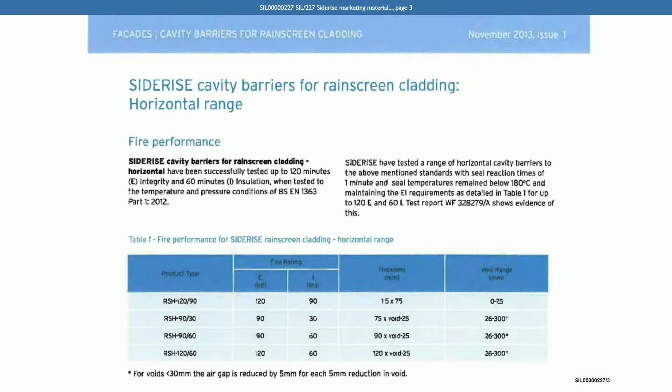Can we look at the report referred to there? There is a test report with the number 328279. Can we go to that report again, SIL00000212, and I want to look again at page 31. We get the integrity results at the top of that page in the table. Now we can see from this table that only specimens A and D have achieved the integrity requirement of 120.

Do you see that? That's correct, and that refers to the 120 product in the table of the datasheet. Yes, so specimen A was 120 millimeters thick, specimen D was a graphite intumescent, and specimens B and C were 90 millimeters thick and 75 millimeters thick, respectively. Can you help us as to why, even though only 2 of those have got over 120, the results in B and C are not reflected in the marketing literature? They are. If you go back to the table and the marketing literature and read the paragraph again, it says performances up to 120 minutes. If you look at the table, then it has in there for products B and C, 90 minutes integrity. I see.

Okay, so you're satisfied, are you, that they're comfortably within those limits? Yes, yes, okay.

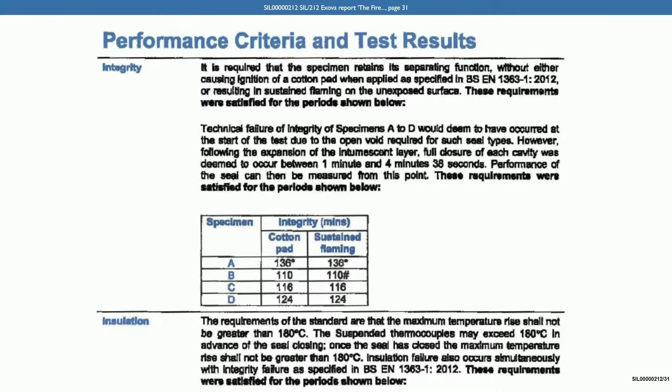Now, this document entitled Cavity Barriers for Rain Screen Cladding, if we go back to page 1 of that document, SIL00000227, so that's its title, Cavity Barriers for Rain Screen Cladding. It's right, isn't it, that nowhere within this document or any similar marketing literature has Siderise expressly stated that those barriers have never been tested as part of a rain screen system, but have only ever been tested between concrete lintels.

That's not made clear, is it? Not in this context, no, but as I explained yesterday, testing cavity barriers on the furnace test, the temperatures are higher on the furnace than the failure criteria for an 8414. So therefore, a cavity barrier would not be the weak component within an 8414 test.

Yes, I understand that's your evidence. And I think the discussion yesterday on the 25mm air gap and the panel movement, I think it needs to be understood that the intumescent at 1.5mm thick has an expansion coefficient of 25 to 1, so it will expand to 37.5 millimeters. So it's over-engineered for a 25mm gap.

Yes, I understand you're saying that about the cavity barrier, but this is a document that is entitled Cavity Barriers for Rain Screen Cladding. And I just wanted to be clear on the point that in this document, it does not state—I appreciate you say the reasons why that is—but it doesn't state that the barriers have been tested between concrete lintels and not with a rain screen barrier on the outside.

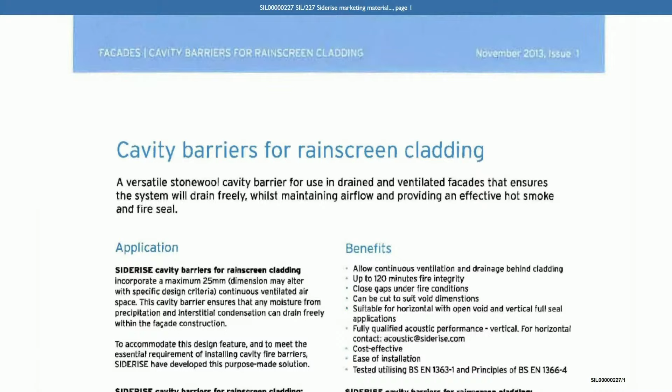Yeah, now let's just look at another document now. This is RYD 303992. This is another Siderise document from March 2015. Sorry, no, RYD 303992, and that's got 4 zeros, the one on the page.

RYD 303992. Yes, so here's a document from March 2015. You can see that it says version 1.4, March 2015, in the top right-hand side. And this is entitled Siderise RH, horizontal, and RV, vertical, cavity barriers for use in the external envelope or fabric of buildings. And at the top, we can see in the part with the picture, facades, horizontal and vertical cavity barriers for rain screens.

And if we go on to page 3, we have some similar text to that which we saw in the document we were just looking at, on the right-hand side. I'm not going to ask you about that again, we've gone through those points, but I want to ask you about some text about the 50mm air gaps on the bottom right-hand side there.

Siderise RH50, open state horizontal cavity barrier for maximum 50mm air gaps. Do you see that paragraph? Yes. And if we could just go down the page so we can see the text underneath.

It says there, Siderise have tested a range of horizontal cavity barriers with 50mm air gaps to the above-mentioned standards, with seal reaction times of less than 1 minute. And here it says full closure at 2 minutes 22 seconds. So you are using a full closure figure at this point in the marketing literature, yes?

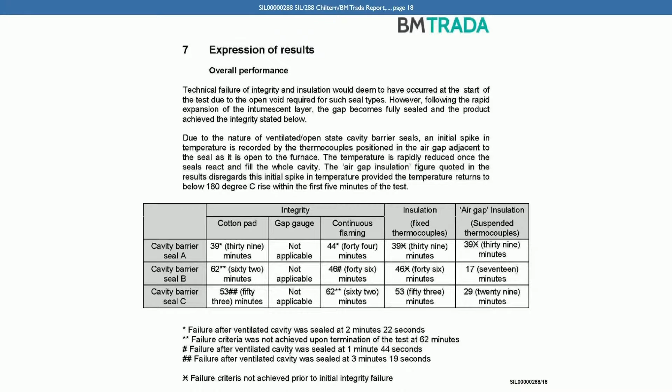I see. Moving away from the marketing literature now, but before we go to your Grenfell project work, can we just look at a document from January 2015, SIL 406559.

This is an email chain relating to a Belfast hospital project. If we look in the second email down in the chain, we can see on the 19th of January 2015, Kelvin Williams, a Siderise employee, says to Barnaby Carrick, also within Siderise, hi Bar, referring to an email. He says in the second paragraph, Chris M issued a statement that all requests for these products would have to be okay by him.

Now, can you recall what that statement was and what products had to be okayed by you? Yeah, if you look at the subject title, it says Belfast Hospital MSDS and technical data sheets. At the time, we were looking at resource level within the business as to how often we had these inquiries directly through to us to supply data sheets and MSDS information to a customer, as opposed to our website.

Yes, and what does MSDS stand for? Material Safety Data Sheet.

So it's basically I was keeping a tally on the number of times this was happening. Right, on the number of times that you had to supply data sheets to customers on projects. Yeah, whereas opposed to our downloads.

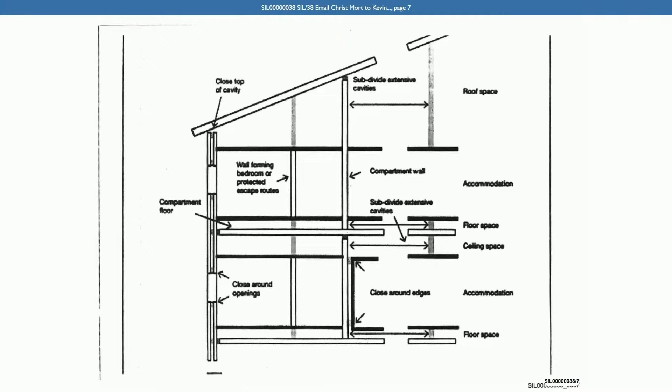And you say below that, if you need me to comment on a specific detail, please forward over and I will respond immediately. You apologise for the delay, and you also attach diagram 33 so that they can see that below. And we can see from page 7 of this document run that diagram 33 has been provided by you at that time. And you've also provided some standard details, some Siderise standard details. If we look, for example, at page 5, you provided some standard details relating to the Siderise products, yes? Yes. We can see on the right-hand side in the label to that drawing, it's headed Siderise standard details compartmentation.

Now, you did not in this email say anything about the suitability or risks associated with using cavity barriers in conjunction with ACM rain screen cladding. That's right, isn't it? That's correct. Can you explain why not? Why not identify those risks when you were responding at this time?

We were responding as to the suitability of the product for use within a common construction environment. The checks on the cladding suitability, etc., are not the responsibility of Siderise. That's the responsibility of Harley Curtain Walling, the fire engineer, and the approving authority on the project.

You didn't explain that your cavity barriers had only ever been tested between concrete lintels and not in an ACM system. Why was that?

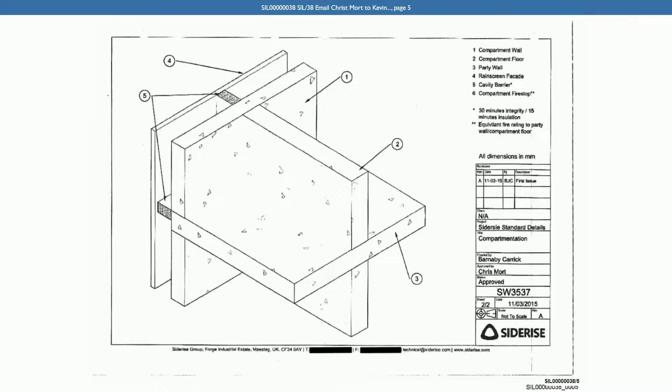We test to the published standard. Under the CDM regulations, the designer of the project is responsible to understand the overarching regulations required. They should understand the requirements of Approved Document B, and the testing for cavity barriers is in compliance with the table in Appendix item 15, cavity barriers 30:15. The overall wall section in Section 12 of Approved Document B is the responsibility of the facade contractor and the end users. It's not us—we don't supply the panels.

Why couldn't you have said, for example, something along the lines of: do bear in mind that if the ACM cladding fails, the cavity barriers will be ineffective, and we have only tested our cavity barriers in these limited scenarios? Why didn't you spell out that in your response?

At that stage, we weren't being asked that question. I answered a specific question. Yes, but wouldn't that be information that it would have been helpful for the design team to be aware of? But the design team, under the CDM regulations, should be aware of that situation anyway. It's not our responsibility to enforce the CDM regulations.

Yesterday, I showed you parts of Dr. Lane's report where she identified the potential mechanism of failure of cavity barriers when used in combination with ACM or other metal cladding panels. And you accepted that in general terms, the risks about the way these cavity barriers might behave in combination with rain screen panels was appreciated by Siderise prior to the Grenfell project. For the transcript, you said that at page 121 yesterday, day 102.

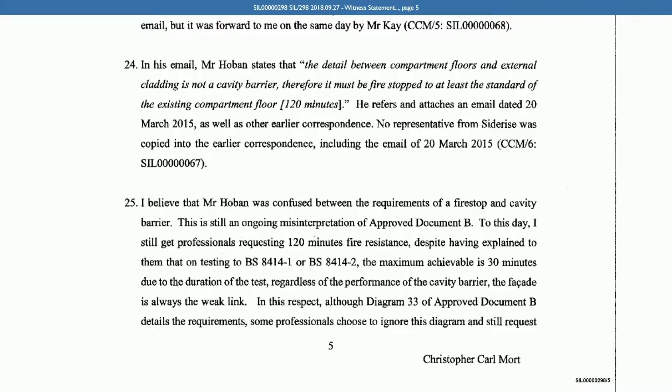And in terms of why you've not raised those limitations, can we refer back to the answers you just gave a moment ago when I was asking why you never raised these risks with the professionals on the Grenfell project? It comes back to, we haven't got any design responsibility on the project. We are not contracted for design. There's fire engineers, there's consultants, there's architects, there's approving authorities. They are the ones who are responsible for the project.

Now, you say at paragraph 26 of your witness statement, page 6, that it's likely you spoke to Mr. Kay about this email, although you're not able to specifically recall. Does that remain the position, that you can't recall specifically discussing this with Mr. Kay, although you think you probably would have done? Correct.

We can see, moving forward with the documents, if we go to SIL 6070, that Mr. Kay responded to Mr. Hoban's email. And this picks up on something you were mentioning earlier, that Ricky Kay goes back in this email to Ben Bailey and John Hoban, and he says, this is the 30th of March 2015, dear all, please can somebody forward over a drawing of the build-up of the cladding so that my technical officer can evaluate and forward an official response with a Siderise product specification. When he's referring there to my technical officer, is that you he's referring to? Yes, he is.

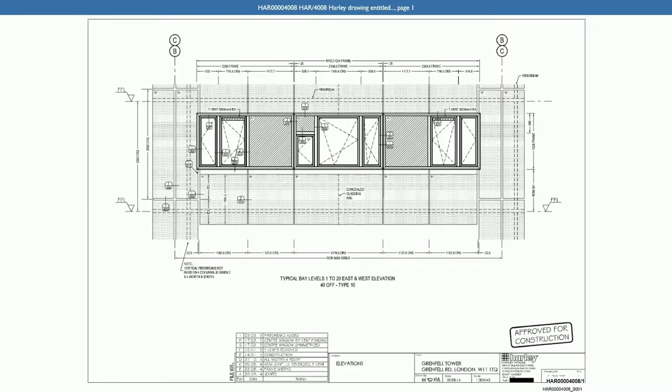And then if we turn to the next document in the run, RYD 37412, we can see that Ricky Kay has responded to Ben Bailey saying, to enable us to assess, please see attached markup of section drawings that are required by my technical officer.

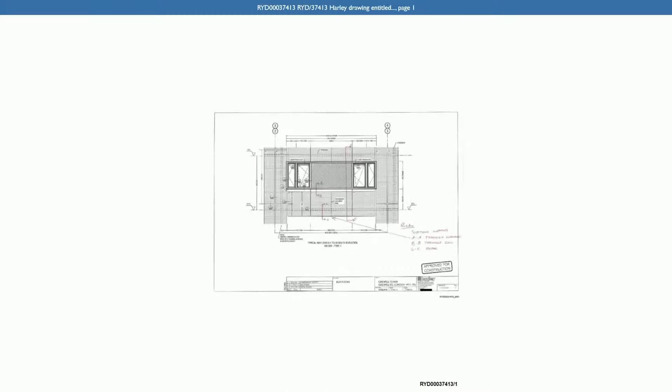And if we turn to the markup, this is at RYD 37413. If we could blow that up, what we see is some red pen annotations on this drawing where you've identified 3 sections, section AA, BB and CC. Yes, can you see those? Yes. And is this your writing? Yes, it is. And you've indicated section AA going through the cladding, section BB going through the sill, and section CC showing the total section, so you can see the whole thing, the full building.

And if we turn now to Mr. Bailey's response to this request for sections, this is HAR 19401.

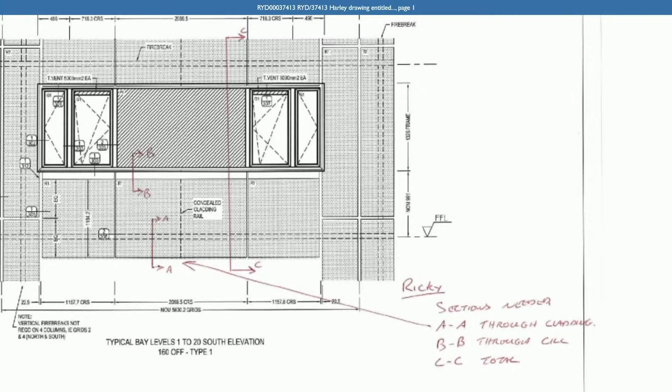We can see that Ben Bailey responds on the 30th of March 2015 to Ricky Kay and copies you in. He says: Ricky, as discussed, the 2 drawings attached represent section AA window head and BB window sill, which can be combined to create CC, as we don't have a drawn detail to cover what Chris is requesting. Do you see that? Yes.

Did that strike you as odd that they couldn't give you the combined section CC? They were only going to give you the window head and the window sill detail separately, but not the whole section? Yes.

From me, I would have expected to see section CC because it gives you the full picture of the makeup. And on other cladding projects, if you'd requested that, would you have normally been provided with that? It's normal standard construction process.

And was it sufficient? Mr. Bailey is indicating here that it would be sufficient simply to imagine combining these drawings to create CC. Was that sufficient in your view? With my experience of facade curtain wall design, I could combine the 2 to understand what was going on, although section CC would have clarified it.

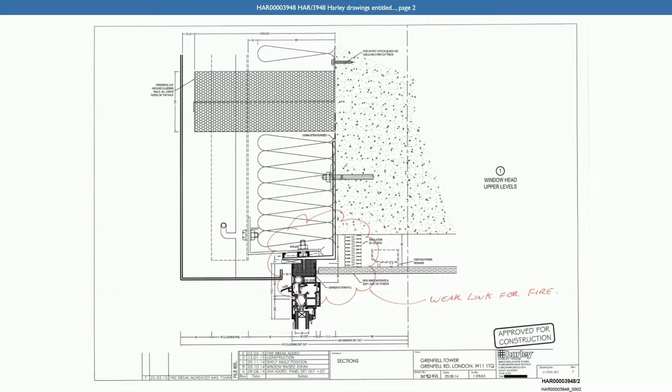Now, the drawings that Harley sent you, and if we go back to the sketch at the top, page 1, just to be clear, what you've done on this sketch is you've suggested your doubling up solution on the right hand side, is that right?

Yes. So what you've done is above each window you've put 2 cavity barriers, both of 90/60, to give you 180/120 protection. As you go up the building, you got one at the sill, one at the head, one at the sill, one at the head, as you go up the building.

And just to be clear, that doesn't solve the problem with the head of the window, does it? No, not at all. This was just your doubling up solution for the building control officer who wanted 120. In reality, the windows should be further into the building to align with the existing structure.

Yes. Now, these drawings that Harley had sent you did not include any cavity barriers at either the jambs of the window or the sill of the windows. Did you notice that at the time?

The vertical cavity barriers that are drawn on the drawing, without knowing the makeup of all the bracketry that's within the curtain wall system, the verticals seem to be logically as close as possible within that window zone.

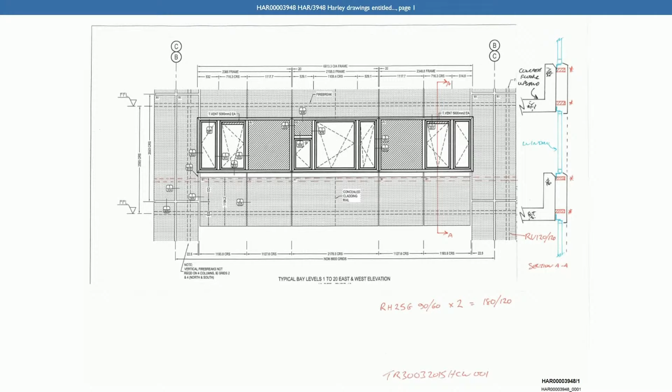So if we look on the right-hand side, that cavity barrier you've added there at the sill location, that's not immediately at the sill, is it? It's still a little bit below it, yes? In all fairness, what's drawn there is a schematic. I'm not responsible for the overall design. It's a schematic drawing from the very poor drawings that were given by Harley.

But did you intend that somebody looking at these annotations would appreciate from what you'd put here that there also ought to be cavity barriers at the sill of the window? There should be, but like I said, the design team for the project, including the fire engineer and the fire strategy, they should have discussed the locations of all cavity barriers on the project. There should be, within the fire strategy, clear drawings laying out the location of cavity barriers and fire stopping on the project.

Did you ever say that to Harley? Did you ever say verbally around this time, these drawings are very, very basic, you should have something better than this? Not my place to do that.

And did you ever raise this weak link point any more widely than we see in these emails? Did you ever discuss it with anybody subsequently? No.

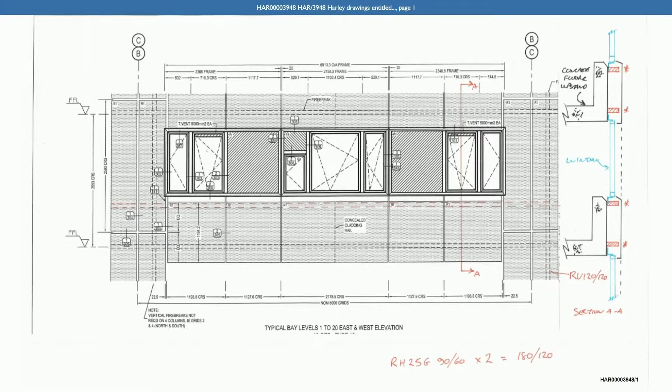This was the covering email we looked at earlier where you sent these sketches. Looking at the third paragraph down, you say: please note that without specific details of the overall construction of internal linings and/or the fire strategy for the project, I can only offer the proposal above. And as this is a refurbishment, I would imagine that the internal linings will remain in situ.

Made good to openings only, which does not aid the fire strategy. Now, can you explain to us why you said that in this email?

On a refurbishment project, you can see from that drawing there's an existing window frame. On residential refurbishment projects, they don't move the residents out, so the existing window frame would remain in place until the external items have been installed. Then they would remove or crudely remove the internal frame. From that drawing, they're quite clearly leaving the frame in place and making good around it. It's a refurbishment strategy. Yes, yes.

Did you feel that you were able to advise without sight of that fire strategy for the project? No, because like I said, I'm at Siderise, we're not contracted to the project for the fire strategy.

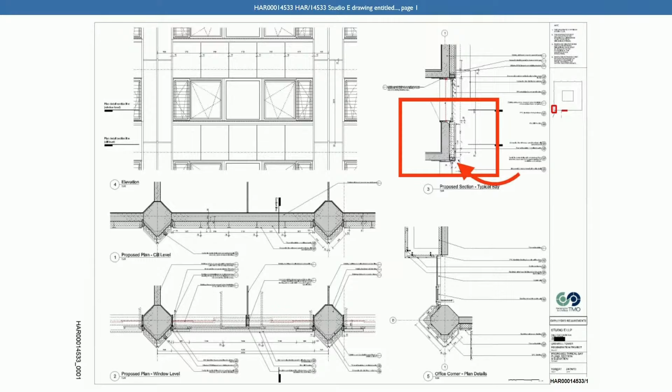Yes, and if we just look at the drawing that was sent through at this point, HAR 00014533, what we can see is what was sent appears to be one of the Studio E tender drawings. If you look in the top right-hand side, we can see that Mr. Bailey, Ben Bailey, has highlighted a proposed section. If we could blow that up a little, what we can see is that in this drawing, in fact, the cavity barrier is placed immediately at the head of the window.

Do you see that? Yes. Do you remember looking at that? No. When it was sent through? No. And did you ever have any further discussions with Harley, Mr. Bailey or Mr. Lamb about this? No. After this time?

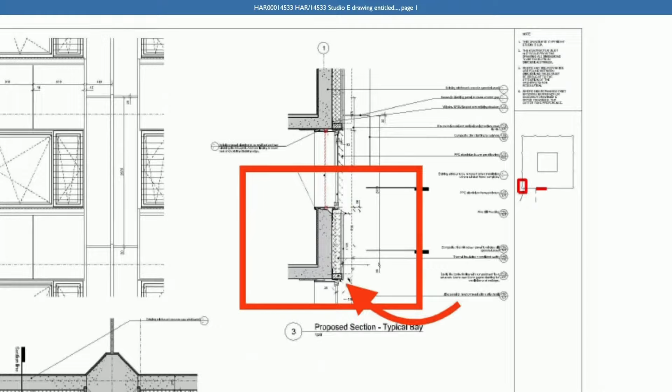And then just again, just for completeness, we can see you respond on the same day. If we go to SIL 50169, this is you to Mr. Bailey and Mr. Kay, 2nd of April, same day. And you say, 'Hi Ben, sense at last from the building control officer. So I take it the meeting for Tuesday is not needed. If you need any further assistance in the future, please do not hesitate in contacting us.'

So just to be clear, did you ever receive any confirmation back from Harley that they had understood the point you were making about the weak link at the head of the window? No. And you didn't follow up on that at any stage afterwards? No. Sorry, yeah, did you say no just then? I said no. Yeah. Right.

And given that you were flagging a potential life safety fire issue, did it occur to you to follow up on it and to check that Harley had understood the point you were making? I had given the advice in good faith to the project. They should be experienced enough to heed that warning, and there's others there who were responsible for the design of the project. We weren't responsible for the design. They could have been using a whole host of different materials, not Siderise materials, to close that gap. It wasn't evident from that drawing.

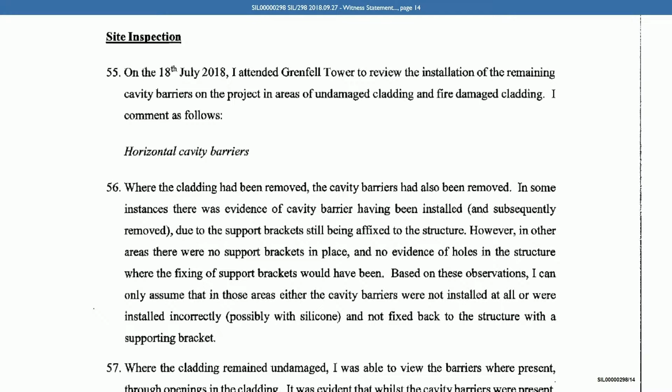So what I'm going to endeavour to do is just summarise the problems you've identified, but please correct me if I've summarised them unfairly or incorrectly. So at paragraph 56, you're essentially saying that in some locations you were unable to identify support brackets or holes for support brackets, which suggested to you that cavity barriers either had not been installed at all or had been installed incorrectly without support brackets and perhaps with some silicone, yes?

Yes. What would be the effect of installing the cavity barriers with silicone rather than support brackets? They're not installed in accordance with our guidance and in accordance with how they're tested. Yes, so therefore they're non-compliant.

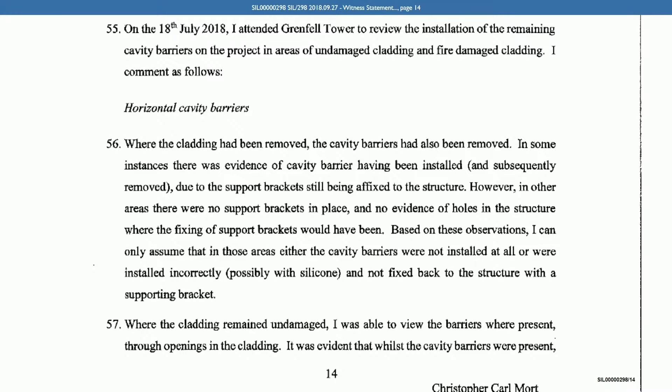Yeah. Then at paragraph 57, you tell us that in areas where the cladding was undamaged, the horizontal cavity barriers you observed were not installed in accordance with published installation guidelines. In particular, the gaps were too wide and therefore would not have been closed by the intumescent, yes?

Yes, we talk about very large differences in installation guidance. Instead of being a 25 millimeter gap, you've got a 140 millimeter gap. That's way beyond any form of sensible parameters.

Yes. And in respect of vertical cavity barriers, you notice that in some places the horizontal support brackets had been used, thereby piercing the end of the cavity barrier, yes?

Yes. Now, just to be clear, from recollection, when you looked at the vertical cavity barriers, did you actually see full fill vertical cavity barriers having been installed in that vertical position? There were vertical barriers in there, but there were gaps and things - without seeing the photographs of the full report, it's difficult to comment.

It's just because a number of the inquiry's experts have seen horizontal barriers, and we have photographs of those installed in the vertical position. Did you see any evidence of that? We only could see the barriers that were there at the time. They could have been removed.

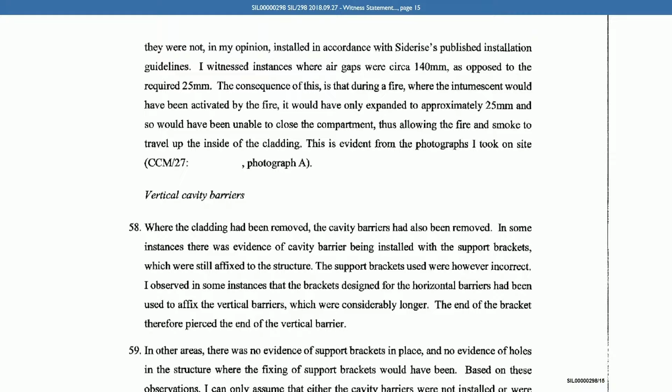So they're supposed to be full fill cavity barriers installed under compression, yes? Correct. And in fact they've got gaps of 50 millimeters, yes? Yes. So that would render them ineffective, is that right? Correct. And because they don't have intumescence, do they? That's correct.

Yeah, and then just for completeness, at paragraph 59, you also tell us that, as with the horizontal barriers, there are areas where you were unable to identify support brackets or holes for the vertical cavity barriers, suggesting that either they were not installed at all in those locations or they'd been installed incorrectly, yes? Yes.

Overall, how would you characterize what you saw during that inspection in terms of the quality of the cavity barrier installation? It is probably of the poorest standard I've ever seen.

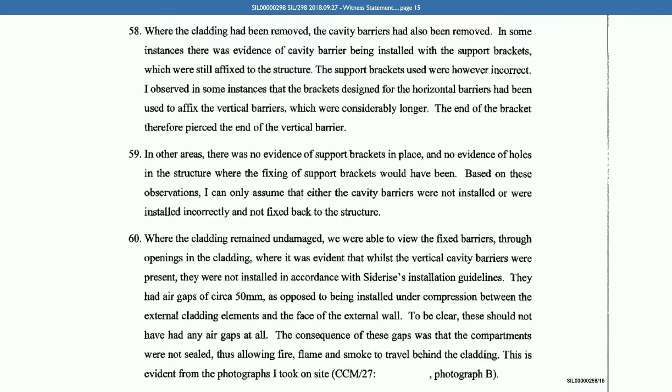You tell us at paragraph 61 of your statement, at the end of page 15, that if you had been asked to inspect the installation during the construction, and it follows logically from your previous answer, that you would have said they were non-compliant and you would have instructed corrective actions, by which I think you mean remedial work to take place to correct all of it, yes?

Yes, we are very clear, there's no grey area when it comes to inspection. It's either right or it's wrong. If it's wrong and it's minor and can be corrected, it gets corrected. If it's significantly wrong, like these barriers were, they'd have to be removed and replaced with new material.

Would it be fair to say that these were fundamental errors in the installation that no reasonable installer should have been making? Correct. Now, we know it was Osborn Berry that installed these cavity barriers. Did you have any prior experience of working on projects in which Osborn Berry were involved? No.

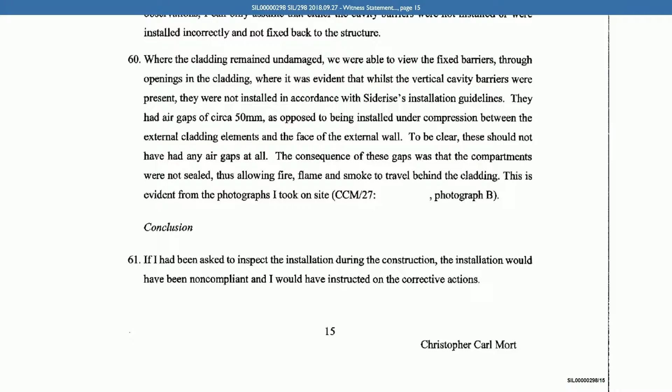And what about Harley's installation ability? Had you ever provided installation advice to Harley previously? I believe there was one previous project, which was a curtain wall project, where an old contact of mine, Terry Nichols, requested some assistance on site, which I handed over to Ricky Kay.

Yes, we're going to come to that in just a moment. Can we just turn to something called the ASFP Red Book? This is SIL 402093, dated June 2016, just to be clear. So this is the Red Book of Fire Stopping by the ASFP, Fire Stopping Linear Joint Seals, Penetration Seals and Cavity Barriers, 4th edition.

Did you have any involvement in the creation of this guidance? Yes, I did. And if we go to page 67, under section 9.2, there's a section headed Installer Certification. In the first paragraph, it tells us that third-party certification for installers is a process whereby the contracting company employs appropriately trained, competent staff to install the required passive fire protection system, and their work is independently audited by site inspections from the third-party organisation, and a full record system is required as part of the scheme.

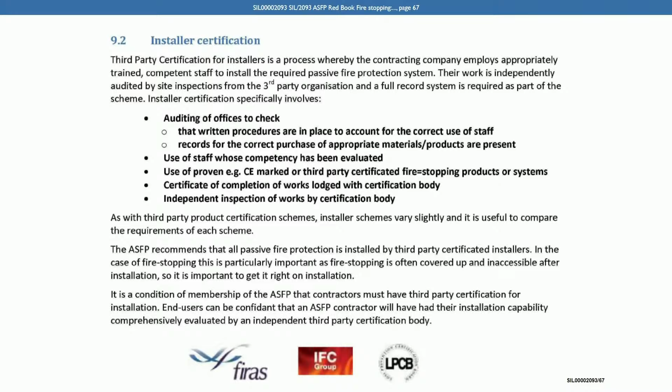And then just finally, that Wayland House project that you mentioned, if we go to SIL00000321 at page 2, this is an email dated the 19th of December 2014. It's in relation to the Wayland's House project, and the subject is fire break Lamatherm, and it's from Ricky Kay to Terry Nichols of Harley, but it's CC'd to you. Do you see that? Yes.

And just for context, Mr. Swales tells us at paragraph 66 of his witness statement, we don't need to go to it, that Siderise had supplied cavity barriers to Harley on 4 separate projects in 2014 to 2015, and one of those was Wayland House. Does that sound right to you? I wouldn't have an overall view of what sales would have sold.

To your knowledge, was this the only other time that Siderise had inspected the work of Harley on a project? It was a function of Ricky Kay's duties. If it is the only one, it is the only one. I wouldn't be aware of Ricky's every day-to-day movements.

Right, yeah. And then we can see from the content of the email that Mr. Kay says, from my visit to site on the 17th of December, I'd like to make the following comments with regard to the install of our Lamatherm. This is the curtain walling fire stopping system in a vertical application on your development at Wayland House, yes? Yes.

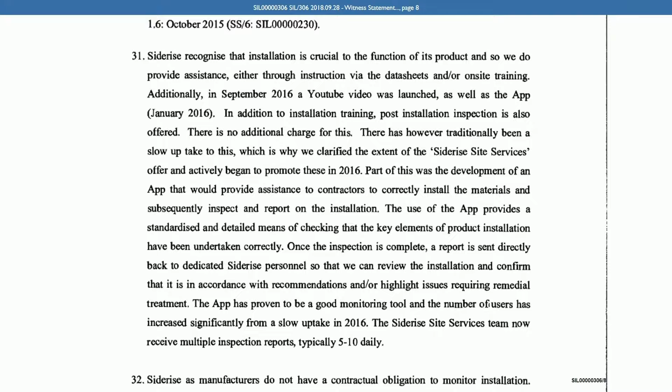To your knowledge, was Harley involved in that trial? No. What about Celotex? No, Harley were not involved with any part of the development of the app, nor was it trialled on any of their sites. And Celotex? Again, we wouldn't be inspecting their materials, since Celotex wouldn't be procuring or installing our materials. We'd only ever inspect our own, and they were not an installer of our products, so no.

As at the time of the Grenfell Tower project, did key accounts qualify for different or better services from Siderise? I wouldn't say different or better. Maybe frequency of visits that we'd offer, and in terms of complimentary visits, we'd be more prepared to go the extra mile in terms of assisting with more frequent visits. It was all down to resource really, but obviously the higher spending key accounts, we would look to go that extra mile where we could.

You referred there to complimentary visits. Does that mean that for other accounts, Siderise would charge for provision of site services and site visits? No, they're always complimentary, but they were limited, again depending on order value. If you had a project that was an 18-month program with 6 blocks, having 3 complimentary inspections throughout that period is not really going to be sufficient. So that's down to myself, the account manager, to agree on the level and frequency of visits up front with the project management team.

We might then increase to doing 2 per block rather than it being 2 throughout the whole duration of the project program. It was just something we'd sort out at an early stage and look to confirm, depending on project program and overall project value to Siderise, as to whether there was resource that could be pumped in to facilitate the inspection needs.

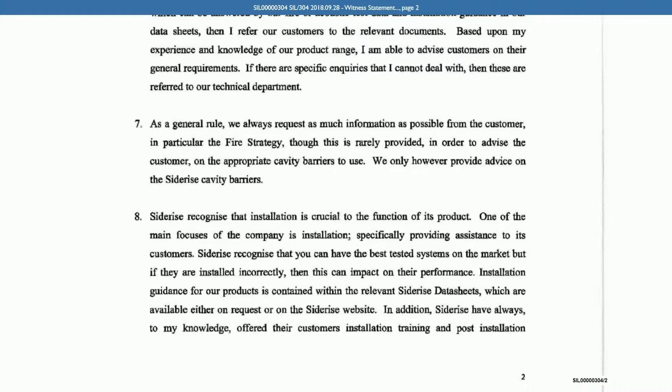I'll summarize those now: data sheets, which include written installation instructions, installation training, installation inspection, and then a YouTube video and an installation inspection template via the iAuditor app. So a range of sources of guidance for customers, is that right? They're all upon request, or they're in the public domain, many of these things, so easy for everyone to access.

And we'll come to it in more detail shortly, but it's right that you inspected the fire stopping installation at Wayland House on that Harley project, didn't you? I'm sorry, I'm not sure that the audio picked up your answer there. Correct. Can you hear me then? Yes, thank you. And if we turn to your email report, that's at SIL00000321 on page 2.

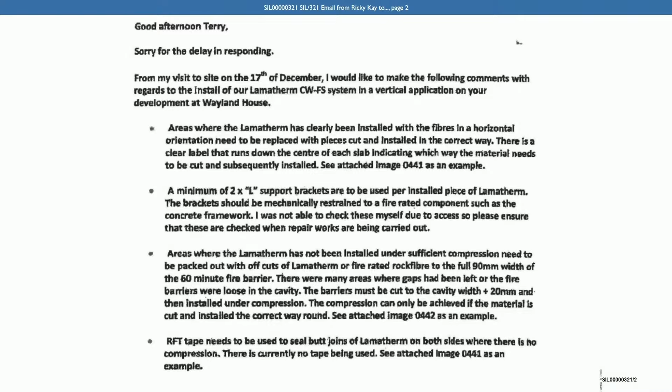You identify there a number of problems with the installation, and again I will summarize those, but if you think I've summarized them unfairly, then please correct me. You deal there with installation in the incorrect orientation, insufficient fixings of the brackets, inadequate or no compression of the product, no RFT tape where the products were joined, and then on page 3, the vertical fire barriers sitting between the vertical cladding rails have been cut too small, so air gaps between the fire stopping and the structure.

In light of the extensive guidance on installation that Siderise appears to have deemed necessary, and the number of problems you identified at Wayland House, would you agree that installation is not a straightforward process? It is a straightforward process. This was quite shocking, if I'm honest, to see this many areas of non-conformance in the system, that if you were to witness the installation of it, you would kind of query, especially with the installation guidance that was readily available to Harley, how they got so many elements of this wrong. So this was actually quite an extreme example, quite an astonishing amount of non-conformances here. I would say this was certainly unusual to see this many in relation to this particular product.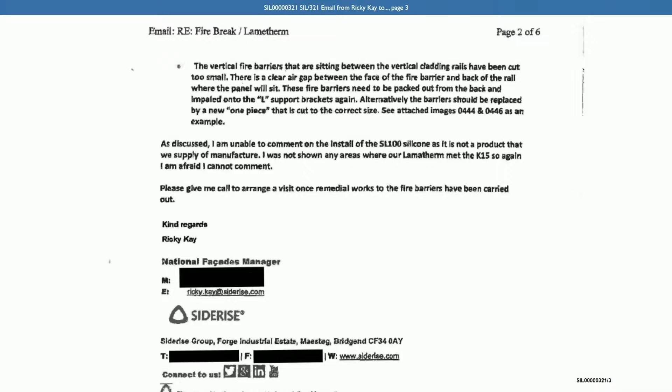Can we turn now to SIL00000227? This, when it appears, will be a Siderise brochure entitled Cavity Barriers for Rainscreen Cladding. We can see from the top right-hand corner that it's dated November 2013, issue 1. Do you see that there? Indeed, yeah. And is this a document that you were familiar with? Can't recall, many moons ago. It's forever evolving, but yeah, I'm sure at the time I would have seen it.

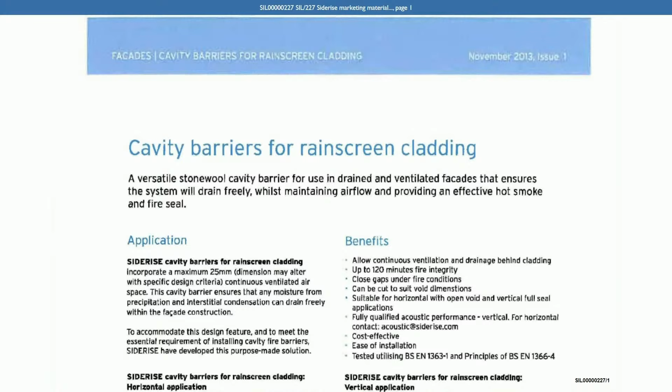And if we look there under the heading benefits, there's a list of bullet points, and the penultimate bullet point is ease of installation. Do you see that? Yeah. So would you agree that Siderise were presenting in their marketing material that one of the key benefits of its cavity barrier product was that it was easy to install?

If you can imagine having a sheet of rock wool, cutting it in a certain direction, sticking two brackets into it and then fixing them to the wall, whilst from job to job there may well be certain interfaces and obstructions, in terms of the actual installation process for that particular product, as you've probably gleaned from my short explanation there, that's all there is to it. And then joining up the joints with tape. There's not really an awful lot of rocket science to it. There's a lot of technicalities that go into the composition of our particular product to ensure that it performs in the way that it does, but in terms of installation, it's a very, very, very simple system to install.

And like I say, the non-conformances that we usually see, or that I usually pick up on from project to project, are generally just carelessness - holes being punched, stuff being trodden on site, the product not being handled properly and being damaged, holes then appearing, which are simple things to remediate and put right. Yes, but I understand it qualifies as a non-conformance when I'm out and inspecting, yes, it would.

Would you agree that presenting the cavity barriers as easy to install might suggest to a potential customer that lesser skilled installers would be required than was in fact the case? That what? Sorry, lesser skilled? Lesser skilled installers. I'll put the question again. Would you agree that presenting the cavity barriers as easy to install in the product literature might suggest to a potential customer that lesser skilled installers were required than was actually the case?

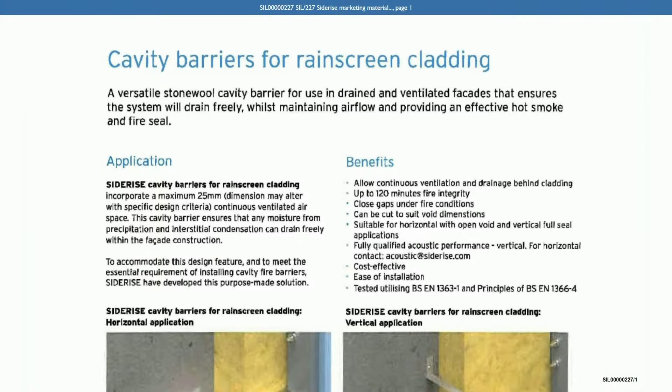You say in the penultimate line of your witness statement, paragraph 8, SIL 50304 at page 2. In addition, Siderise have always, to my knowledge, offered their customers installation training and post-installation inspection, our full service offer, which outlines our on-site support, as in the Siderise Site Services document, which since 2016 has been available on the Siderise website.

And can you help us with why it was felt this document was needed in January 2016? It was us identifying in the market that we were perhaps offering something our competitors weren't. We wanted to formalise that offer into an official document that we could communicate with prospects we were looking to bring on board. We felt it differentiated ourselves from other manufacturers by offering these extra levels of service that we were already mindful were becoming more and more requested within the market.